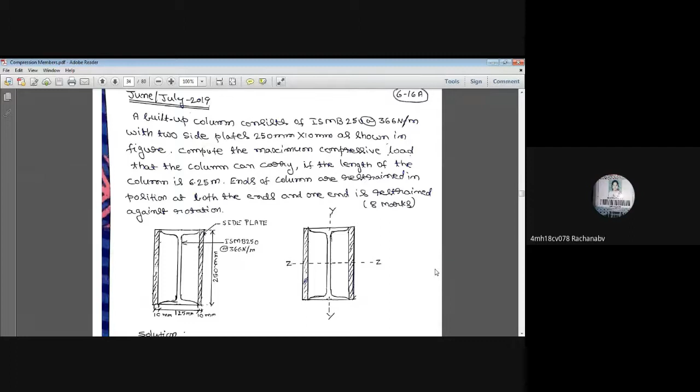So in continuation with the previous class, the same kind of problem, same procedure, but the type of section given has a slight variation. The same question is asked in the June-July 2019 question paper. A built-up column consists of ISMB 250 at 366 Newton per meter with two side plates 250 mm width and 10 mm thick as shown in the figure, which is also provided in the question.

Compute the maximum compressive load that the column can carry if the length of the column is 6.25 meter. The length of the column is given, and ends of the column are restrained in position at both ends, and one end is restrained against rotation. The end condition of the column is also provided, and this problem is asked for 8 marks.

Look at the question or the figure, whatever information is provided. ISMB 250 at 366 Newton per meter section is given, and the height and thickness of the plate are also given. So what we need to calculate is the maximum compressive load that the column can carry. Let us write down the information provided.

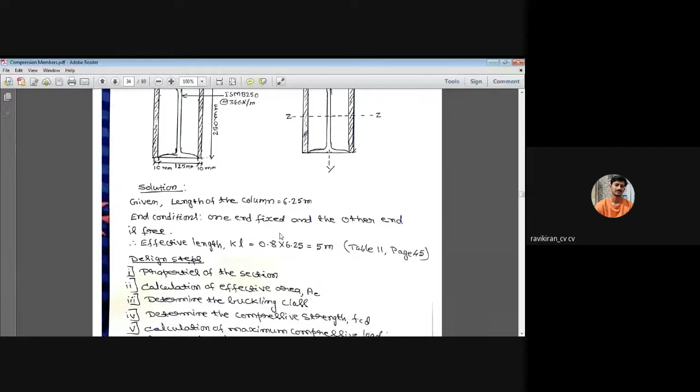First, the length of the column is given, that is 6.25 meter, and the end condition is provided: one end is fixed and the other end is free. So the effective length of the column will become...

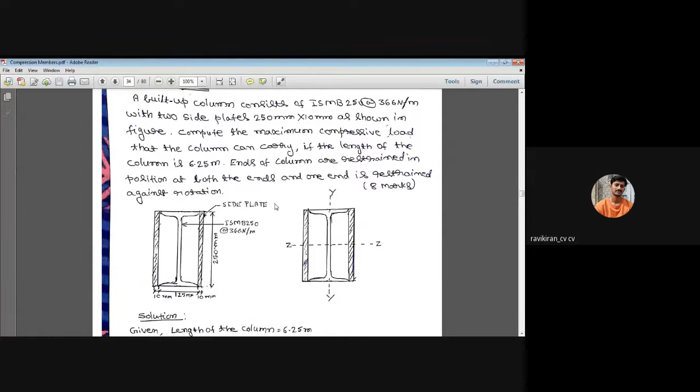Ravi Kiran, there's a correction. It is not free, the other end is hinged. So both ends are hinged. No, one end is fixed. Ends of the column are restrained in position means they are in position, that means they cannot move. They are not free.

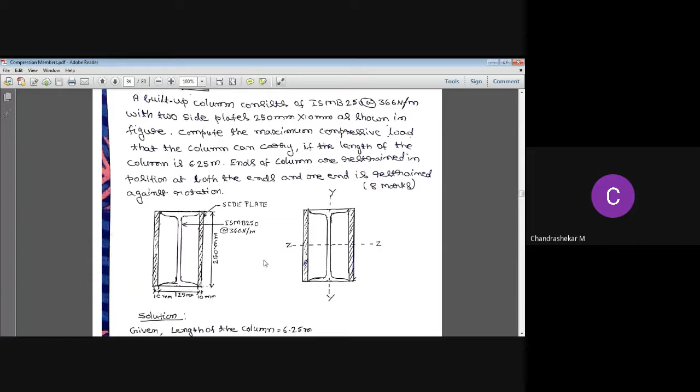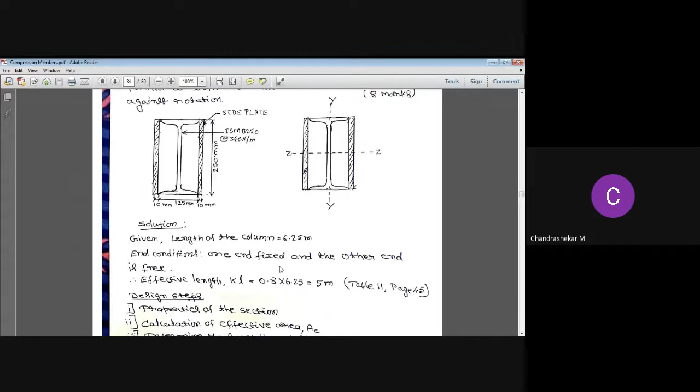It is as good as both ends being hinged. The problem further says one end is restrained against rotation, meaning at one of the hinged ends restrained against rotation, that is fixed. That is nothing but one end fixed and the other end hinged. Please change that sentence, correcting the mistake: one end is fixed and the other end is hinged, not free.

Go to page number 45, table 11, there you'll see the value taken. Effective length KL equal to 0.8 multiplied by 6.25, since 0.8 corresponds to one end fixed and the other end hinged. So everything is okay except that word I wrote earlier. End conditions: one end is fixed, other end is hinged, strike off that 'free'. That's all the correction, sorry for that, thank you.

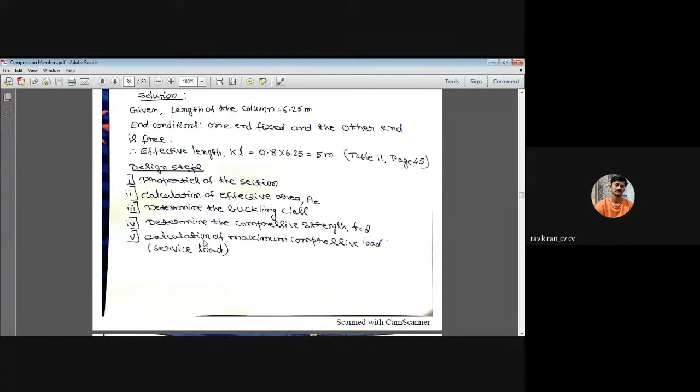The effective length remains as per table 11, page number 45 of IS 800, so the effective length becomes 5 meter. What are the design steps we usually follow? Initially we write down the properties of the section, calculate effective area, determine the buckling class, determine the compressive strength FCD value, and then calculate the maximum compressive load and service load.

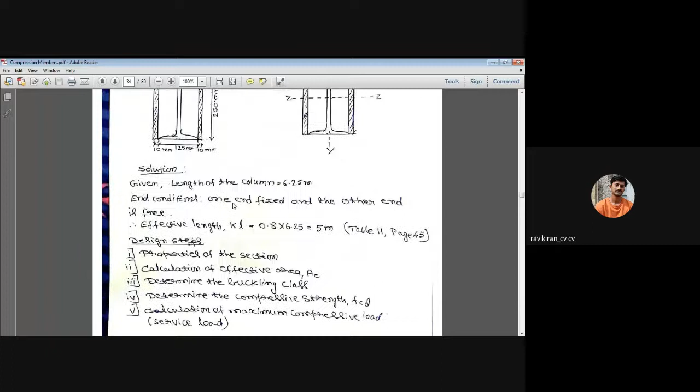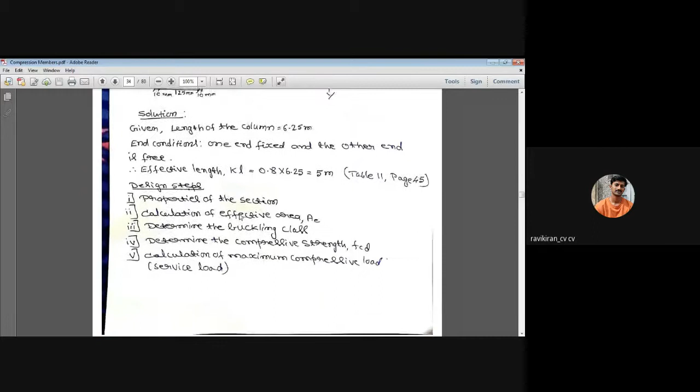The first step is properties of the section. How do we write down the properties of the section? By looking at the steel table for ISMB 250 at 366 Newton per meter. Anyone from the student side, please tell me the properties of this section, what values you are going to take from the steel table.

What is the sectional area? 4755. What is the unit? Millimeter square. And what else information are you going to take from the steel table?

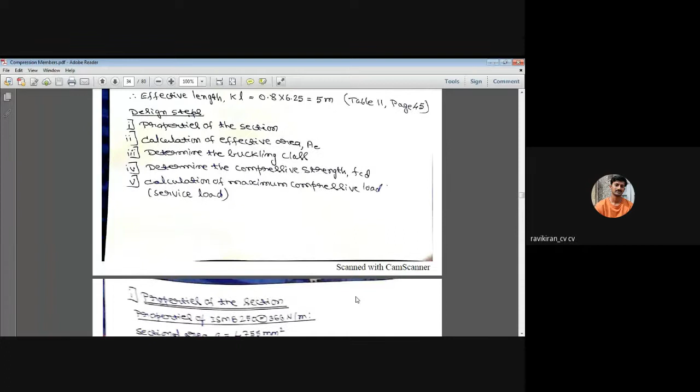Depth of the section is 250 mm, width of the flange is 125 mm, thickness of the flange is 12.5 mm, and thickness of the web is 6.9 mm.

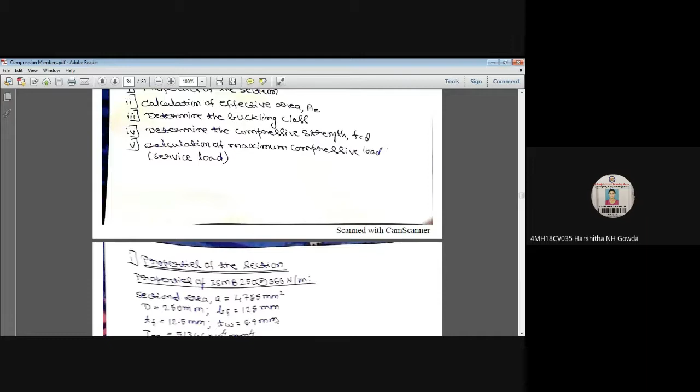Moment of inertia IZZ is 5131.6 into 10 power of 4 millimeter to the power of 4, and IYY is 334.5 into 10 to the power of 4 mm to the power of 4. Good, Harshitha, you said IZZ, I'm really happy, instead of saying IXX, good.

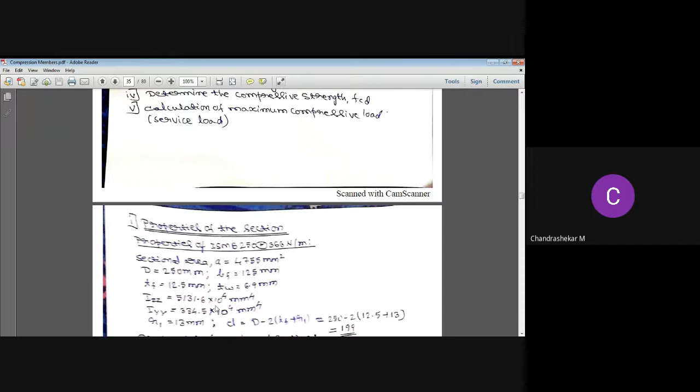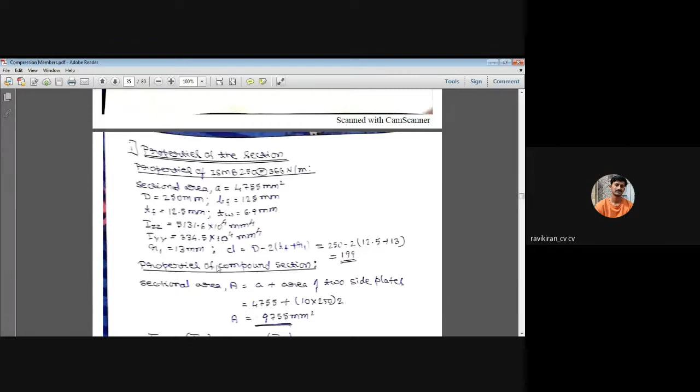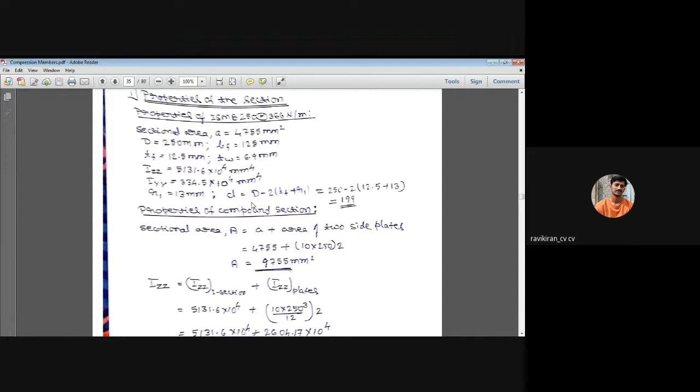The next is root radius, which is 13 millimeter. Don't confuse root radius with radius of gyration, both are provided in the steel table. Why do we need this root radius? To get the effective height of the web section, small d equals overall depth 250 minus 2 times thickness of flange plus root radius, which gives us 199.

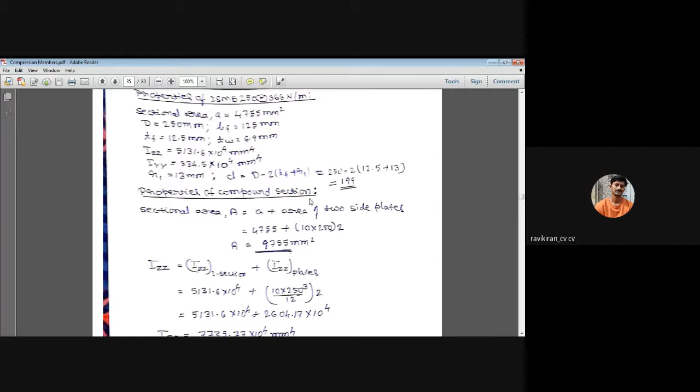And next is properties of the compound section. Compound section means along with the I-section we have two cover plates or two plates, right?

Side plates. Instead of mentioning cover plates, because it is given in the sides, let us consider side plates. So for the I section it is 4755 mm square, and for the side plates it is given 10 mm thick and 250 width into two plates, which will give us sectional area for the compound section as 9755 millimeter square.

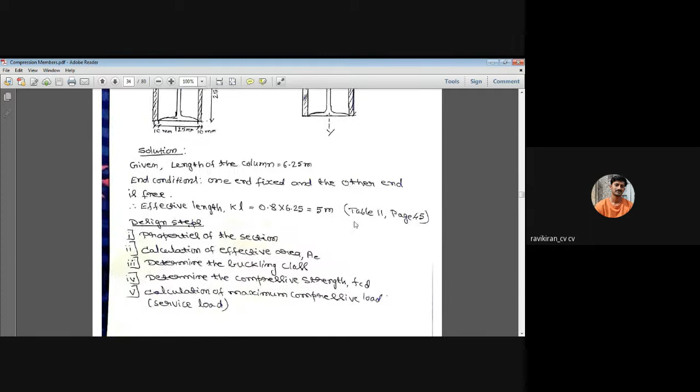Let us do IZZ for the compound section, that is I section as well as plates. For I section it is directly taken from the steel table, and for the plates it is BD cube by 12. We are in the ZZ plane, so just observe the figure. What about area into h square? There will not be height because it is in the same plane, so just BD cube by 12 is enough here. If you do this, IZZ value will be 7735.77 into 10 power 4 mm power 4.

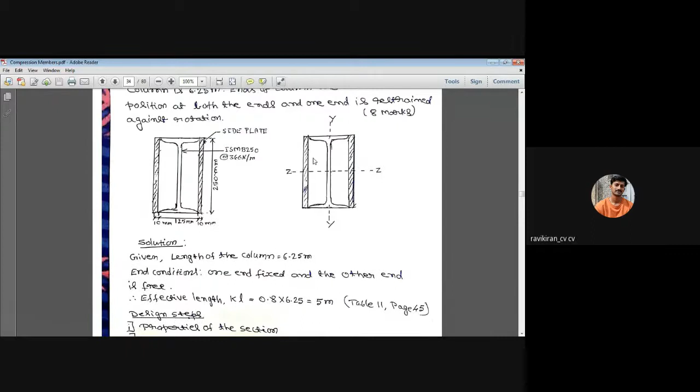Similarly, we should do for the IYY direction. For I section directly you can take from the steel table, and for plates, BD cube by 12 plus area into h square. How to do that? In terms of the y direction, look at the figure. This is the axis, and from here, the center of this plate. So total width is 250, divided by 2 means it is 125, and again half of the thickness of the plate, so 125 by 2 plus 10 by 2, h square is.

If we do this, the IYY final value will be. Ignore the 250 multiplied by 10 cube by 12 because it's a small quantity. I told you to develop the habit of ignoring this small number. Remember, this 250 multiplied by 10 cube divided by 12 can be ignored. Even if you add it, in this case it doesn't matter, it's not going to make much difference. Just for your information, that's all. So the IYY value will be 2616.79 into 10 power 4 mm power 4.

Once we got the moment of inertia values, we can compare ZZ terms and YY terms. The least value will be in YY in this case, so Iyy is 2616. Once we got this, we can go with the least radius of gyration, that is r is equal to square root of I by a. Here in the y plane it is least, so ryy is square root of Iyy divided by area. Iyy value is this, and area we calculated for the compound section, not for the I section. Once we do this, least radius of gyration ryy, we got 51.79 millimeter.

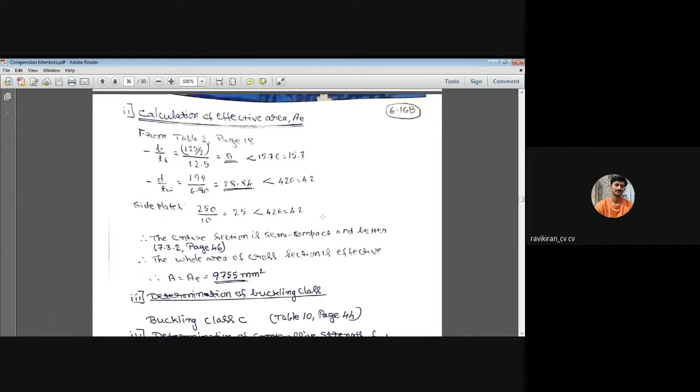Breadth means half of the breadth you should consider, 125 by 2, and thickness of the flange is 12.5, which is equal to 5, and that is less than 15.7 epsilon. If you open table 2, you will understand this. Same way for side plates you should do, that is also coming within the limits. So the entire section is semi-compact, and you can consider the whole area of cross section as effective. So the effective area remains 9755 mm square.

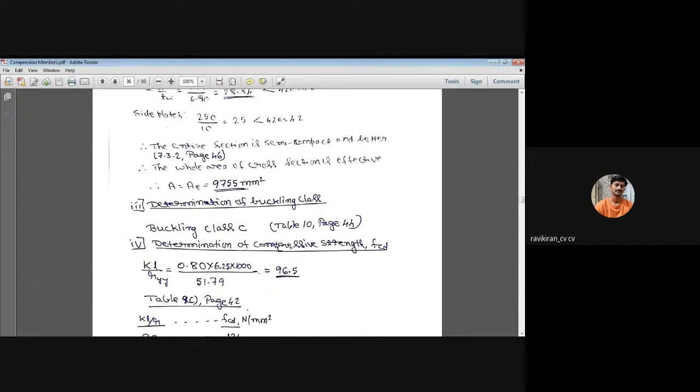Next, determination of buckling class. Initially we mentioned in the previous class, for any built up sections or compound sections, you can go with buckling class C. That is available in page number 44, table 10 of IS 800. Once we got this, what is the next step? Calculation of design compressive strength FCD based on table values. For that, you need to calculate KL by R, that is the slenderness ratio.

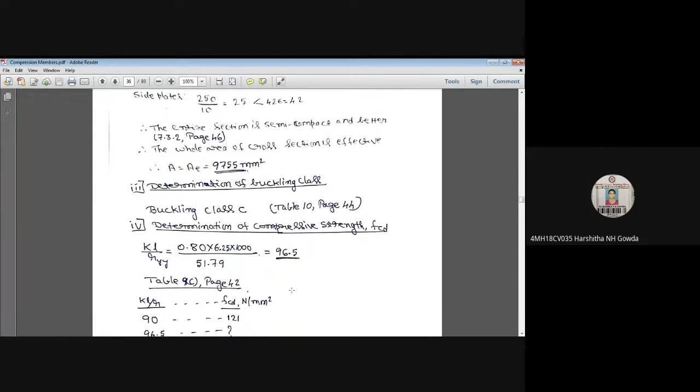If we do this, we are going to get 96.5. The values are available in page 42, table 9C. In that, anybody open and tell me the value for 90 and 100, slenderness ratio of 90 and 100. What is the FCD value from page 42? 90 is 121, correct? 100 is 107, correct. And anyone please interpolate between these two values and tell me what is for 96.5. Do the interpolation for 96.5 and tell me what is the FCD value.

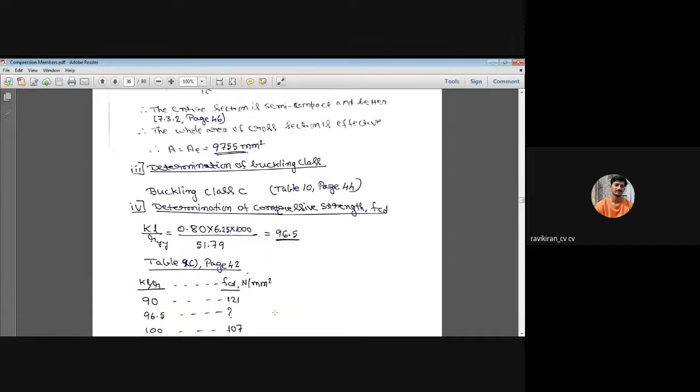111.9. I hope you are not telling from the notes. You have calculated, right? Yes, sir. Okay.

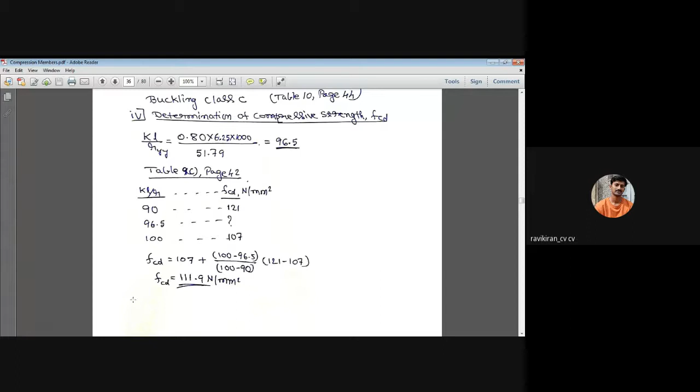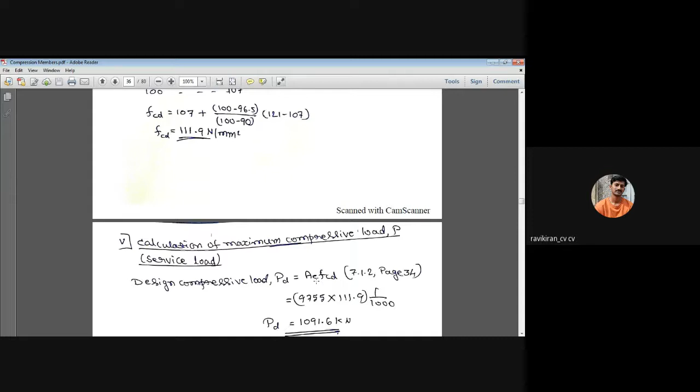So FCD is 111.9. Once we got FCD, what is the next step? Calculation of maximum compressive load, that is P. PD is equal to effective area into FCD. Effective area we just calculated in the previous step, and FCD we got it now.

If we do this, we are going to get design compressive load, but actually what we should calculate is the service load. For that, let us consider factor of safety as 1.5 for the design load. Then the service load will become 727.7 kilonewton. So that is what the maximum compressive load P, 720.

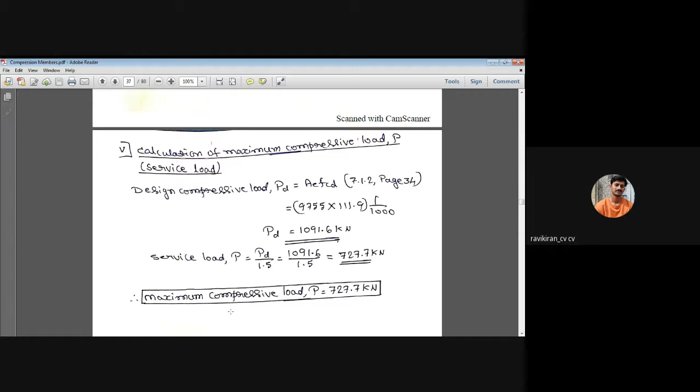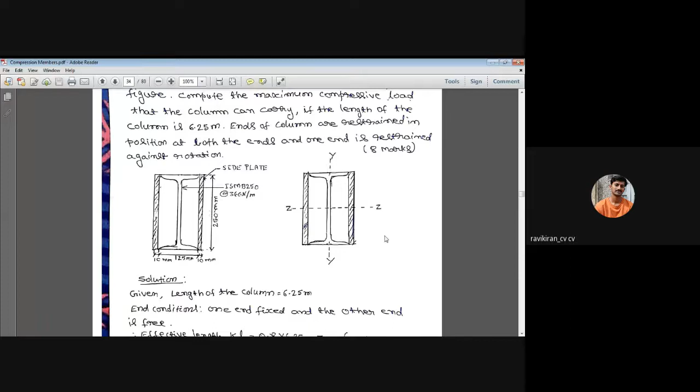This is how you should show in the examination. Highlighting the final answer is very important. If you have any doubt, you can ask me. The same procedure we followed, only the section or the figure given is a bit different from previous problems. That is why we did this one again. If you have any doubt, you can ask me.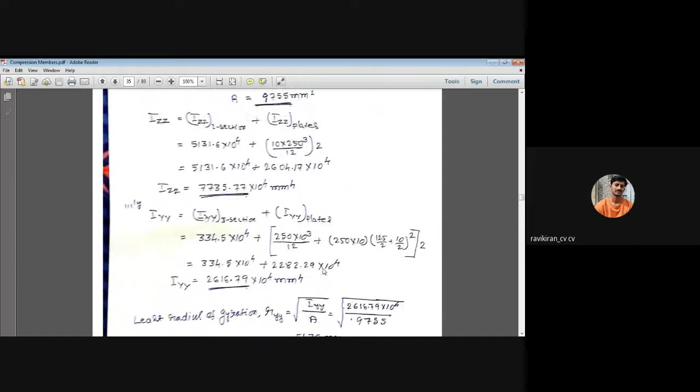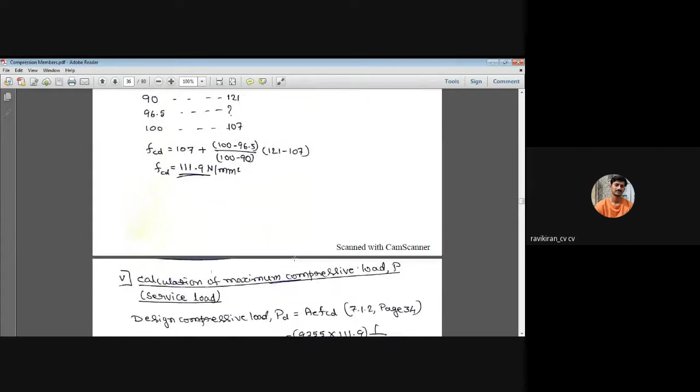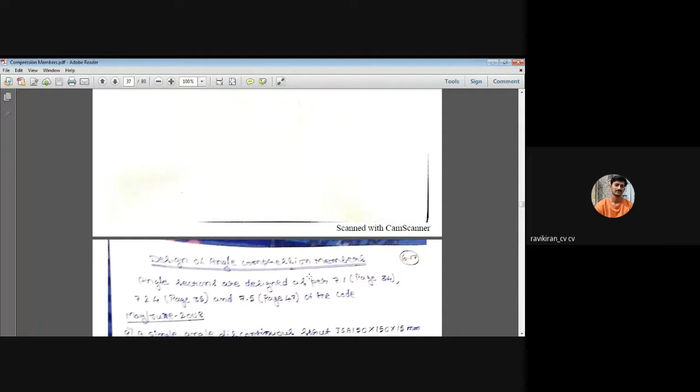If not, let us move on to the angle section. If we consider angle section as a compression member, how do we design that, and where are we going to get angle section as a compression member? As we said in the initial class or in the introduction part, it will be used sometimes as a strut in roof truss.

Design of angle compression member. This is one of the members in this part. Angle sections are designed as per clause 7.1, that is page 34. Also 7.2.4, page 35, and page 47, that is 7.5. You need to follow these pages from IS 800.

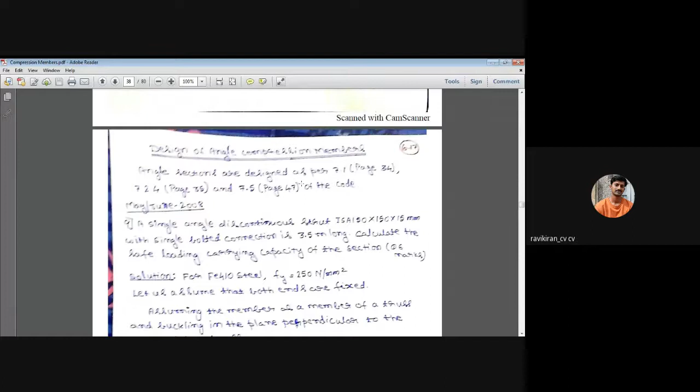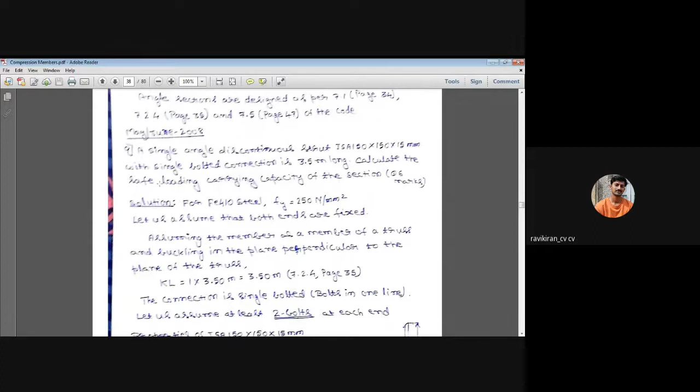So this question is provided in May-June 2008 paper. That is a single angle discontinuous strut ISA 150 by 150 by 15 millimeter. See the angle, both the legs are having 150 and 150 dimension, that means it is symmetrical, both sides same, and thickness is 15 millimeter with single bolted connection and having height of 3.5 meter long.

Calculate the safe load bearing capacity of the section. We need to calculate safe load carrying capacity. So the angle is given, height is given, and what else? Nothing. And calculate the safe load carrying capacity. So let us write down whatever information is provided.

If it is not given, let us consider Fe 410 steel and yield strength as 250 Newton per mm square. Also, let us assume, because support condition is not given, but it is mentioned with single bolted connection, that both ends are fixed, assuming the member as a strut in a truss and buckling in the plane perpendicular to the plane of the truss.

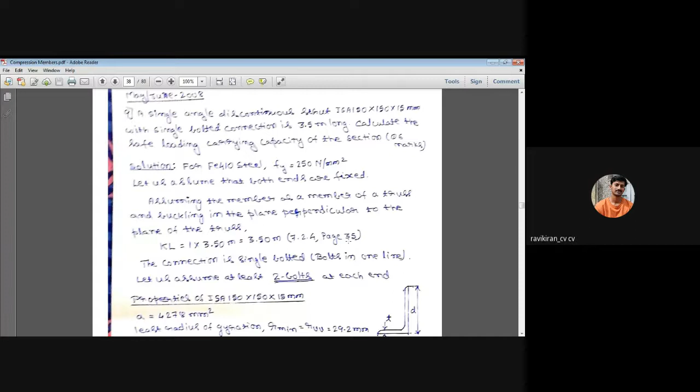If you open page 35, you'll understand. Anybody open page 35 from IS 800? Page 35. Open and state what is the statement written. Just read out. Anyone? Page 35, 7.2.4 compression members in trusses.

In case of bolted, riveted or welded trusses and braced frames, the effective length KL of the compression members shall be taken as 0.7 to 1.0 times the distance between the centers of connections, depending on the degree of end restraint provided. Correct.

In case of members of trusses buckling in the plane perpendicular to the plane of truss, the effective length KL shall be taken as distance between the centers of intersection. The design of angle strut shall be as per 7.5. That is enough. Thank you.

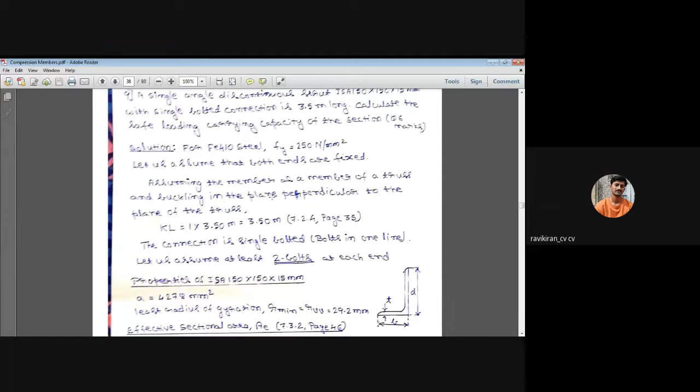This is how, while solving the problem, you should go through every page from the code book which is relevant. Otherwise, definitely you will not understand.

So let us consider the connection is single bolted, that means bolts are provided in one line, and assume two bolts at each end, one at the other corners. So first we should write down the properties, that is ISA 150 by 150 by 15 angle section properties. What is the area provided from the steel table? The area is 4278 millimeter square.

And what is the least radius of gyration? Open steel table and check what is the value given for least radius of gyration for ISA 150 by 150 by 15. All of you should open this. What is the least radius of gyration provided? So what is the page number you are going to, guys?

One of you: 22, sir. Good, so that is page 22 in KLV Ramu. Okay, and what is the R value mentioned? Least radius of gyration you should consider here. What is the least value? Anybody? See, there are three values: Rxx, Ryy, same way Rvv and Ruu, right, for angle section.

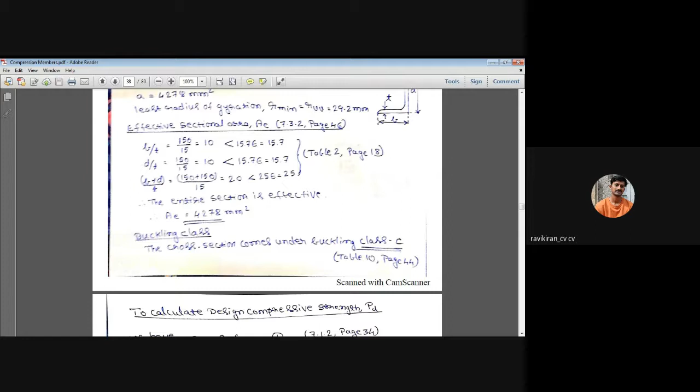See, if you look at the figure, you will understand. Row 2, 3, 4, fifth row - or the second-last row from the bottom. Angle section is provided, right? Channel, angle, T, and solid section. For that, what is the buckling class? C? Yes, buckling class C.

Always, for all types of section given here, you should blindly choose C as the buckling class.

And next, once you've got the buckling class, the next step is to calculate the design compressive strength. Initially, in the previous problems, we used to follow the procedure of going with the KL by R value and taking the value of FCD from the table, by knowing the buckling class.

But here, as it is an angle section, open page number 35. Open page number 35. Here, the slenderness ratio lambda, we need to consider as equivalent slenderness ratio.

The procedure remains the same, but calculation of the lambda value will be somewhat different. For that, you should follow the steps on page number 48. Just open all of you page number 48 to calculate the equivalent slenderness ratio.

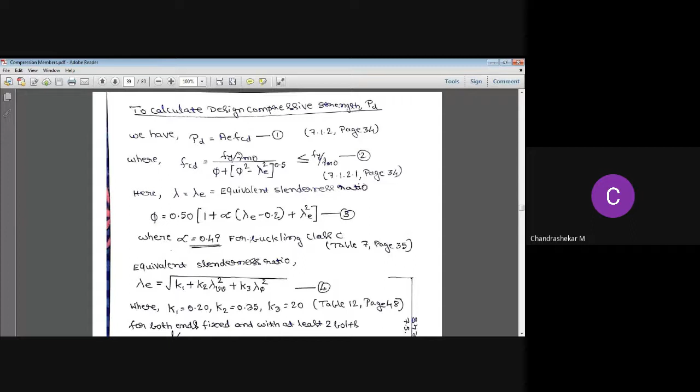So up to equation 1, 2, and 3, I have written. We took that from page number 34. From that point, the formula jumps to page number 48. That's where you are going to use lambda E. In the previous case, you were supposed to use lambda. Here, we are not using lambda - instead we are going to use lambda E, which is the equivalent slenderness ratio. This is for a single angle section. Is it clear to you? Ravikiran, you can proceed.

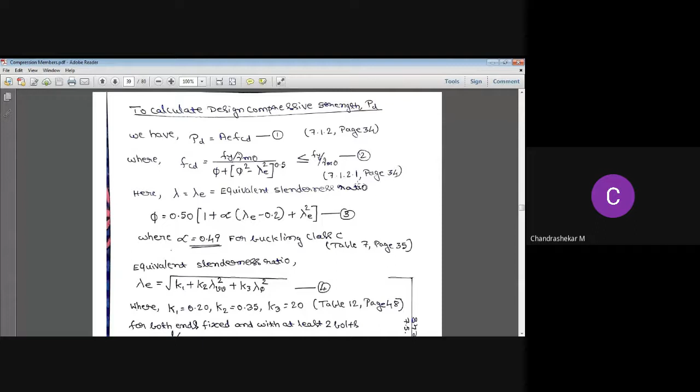Hello? Can you hear me, Ravikiran? Hello? Yes sir. Okay, you can proceed. Yes sir, now it is okay.

I hope you understood why we should consider the equivalent slenderness ratio value for an angle section. Based on that knowledge, let us continue how to calculate the values.

Lambda, that is slenderness ratio. Let us go one by one. Phi is equal to 0.5 times 1 plus alpha into slenderness ratio minus 0.2 plus slenderness ratio squared. Here the unknown things are alpha as well as the equivalent slenderness ratio value. Alpha you can get from table 7 of page 35 for buckling class C, that is 0.49. And equivalent slenderness ratio can be calculated using the equation: square root of K1 plus K2 lambda VV squared plus K3 lambda phi squared. This equation is available on page 48 of IS 800, and the K1, K2, K3 values are also available on the same page, in table 12.

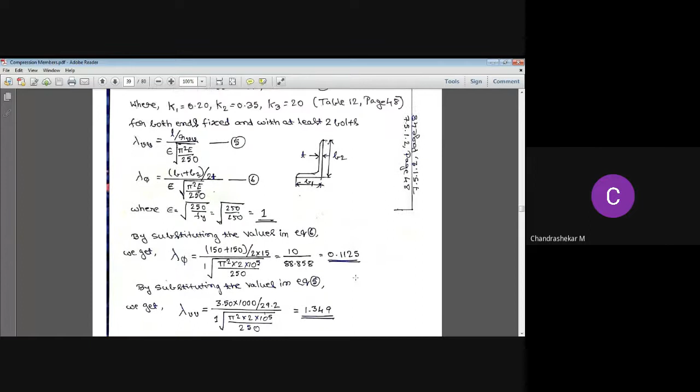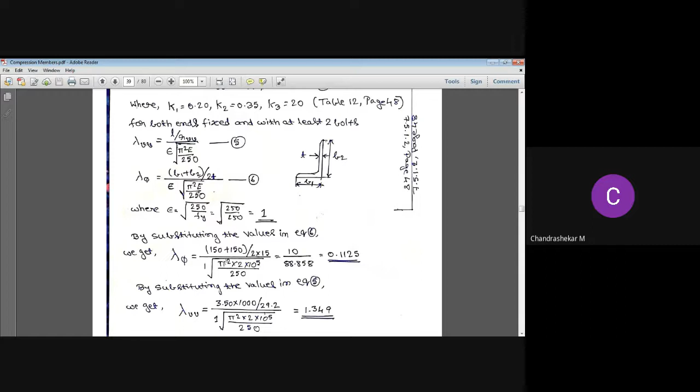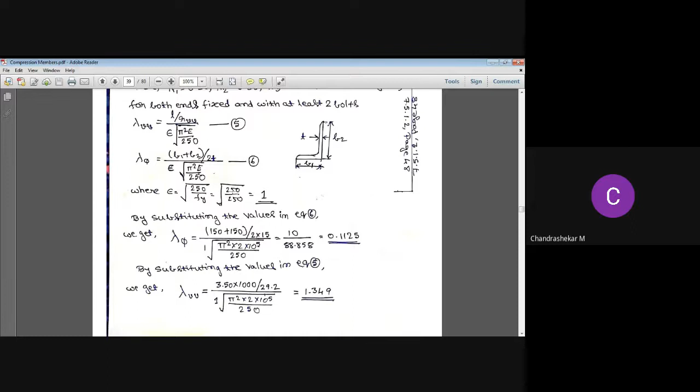Okay Ravikiran, can I interfere? Yes sir. Guys, go to page number 48, under 7.5.1.2. If you look at the formula, lambda VV equal to L by RVV divided by epsilon square root of pi square epsilon - it is not square root of pi square epsilon divided by 250, it should be E, capital E, Young's modulus. So it is a typing mistake - change epsilon to E under the square root. There is one outside the square root, that is epsilon, that is correct. So under the square root it should be pi square E, not pi square epsilon. Similarly, the next one on the same line, lambda phi equal to B1 plus B2 divided by 2t, divided by epsilon - that is correct - square root of pi square E, it is not epsilon. Please change that to E, capital E, Young's modulus, divided by 250.

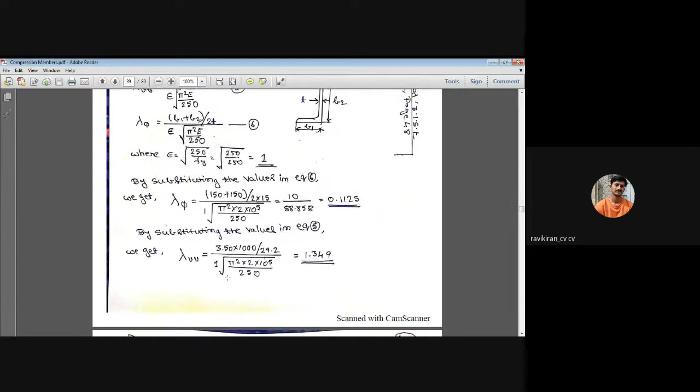So that's all the correction is. Okay, once you calculated these values, you can go back to the previous equation, that is equivalent lambda or equivalent slenderness ratio value, equation number 4. Go down. By substituting the previous values in equation 4, you are going to get the equivalent slenderness ratio value.

You know what is the alpha and equivalent slenderness value. You can get the phi value by substituting, and once we get this, we go with the FCD value, that is 250 divided by 1.1, the standard equation which was equation number 2, provided in page 34. Substitute, and you will get FCD.

Once we got FCD, let us move on to equation 1, that is area into FCD. FCD is 117.3 Newton per mm square. By substituting FCD in equation 1, that is PD equals area into FCD, effective area we already calculated, FCD value we just calculated. The design load will be 501.81 kilonewton.

But we need to calculate the actual or safe load, which is not the design load. For that, safe service load, we should consider some factor of safety. Let us consider factor of safety as 1.5, which is also available in page number 29, table 4 of IS 800. If we do this, we get safe service load as 334.54 kilonewton, and this is the final answer. The safe load carrying capacity of the section 150 by 150 by 15 mm of 3.5 meter length is 334.54 kilonewton.

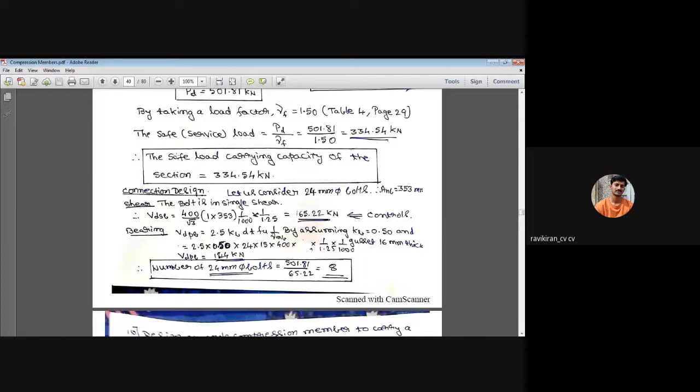Actually, as per the question, I hope this is sufficient. If it is asked to calculate the connection design or show the connection design, you need to calculate further, that is how many number of bolts are required. So I feel all of you understood this. If you have any doubt, please ask us.

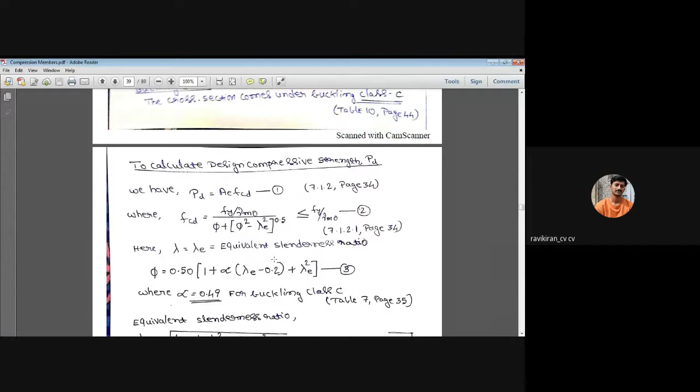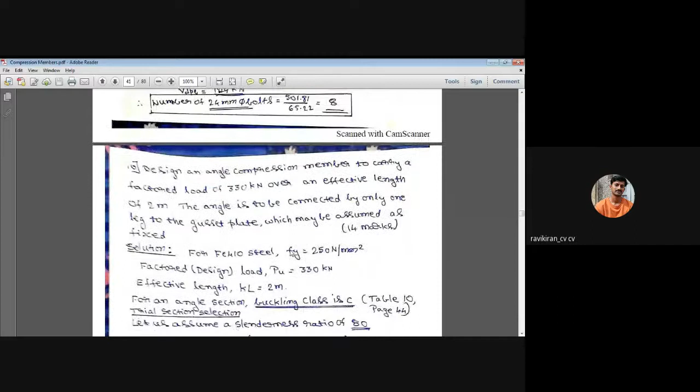Design the next problem: design an angle compression member to carry a factored load of 330 kilonewton over an effective length, directly given as 2 meters. The angle is to be connected by only one leg to the gusset plate, which may be assumed as fixed, and this problem is asked for 14 marks.

Let us write down the data provided: for Fe 410 steel and yield strength as 250. The factored load is given as 330 kilonewton. Effective length, directly KL value is given as 2 meter. And this is an angle section, so angle section means what is the buckling class? It will be C.

Let us see what else information is provided here. Only load and effective length. What type of section is it provided? Is it mentioned what type of section? Just it is mentioned angle compression member. Design an angle compression member. So we need to choose a section to satisfy this load and also this length. So for that, initially in I section also, what we used to do, we used to assume.

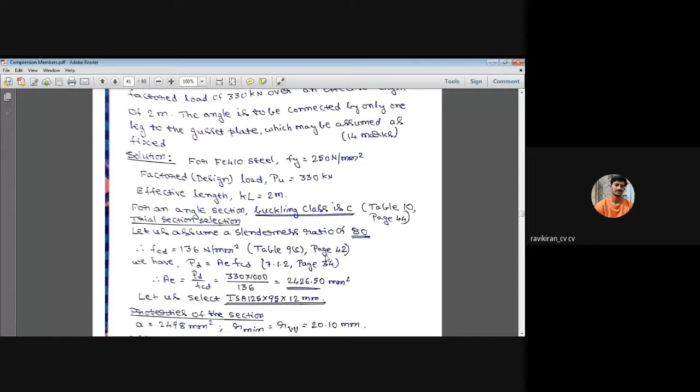When section is not provided in the question, we should assume slenderness ratio value as 80, and for that FCD from table 9C of page 42, it will be 136 Newton per mm square.

So we have PD equal to area into FCD, which is available on page number 34. The effective area will be PD divided by FCD, which gives us 2426.5 mm square. For this area, we should choose a section from the steel table to satisfy this area.

This is how we solved one problem for the I section, right? Same procedure we are following here. Once we selected a section, the procedure remains same. So based on this criteria, we have selected ISA 125 by 95 by 12 mm. You can choose equal angle section or unequal angle section to satisfy this area of 2426.5 mm square.

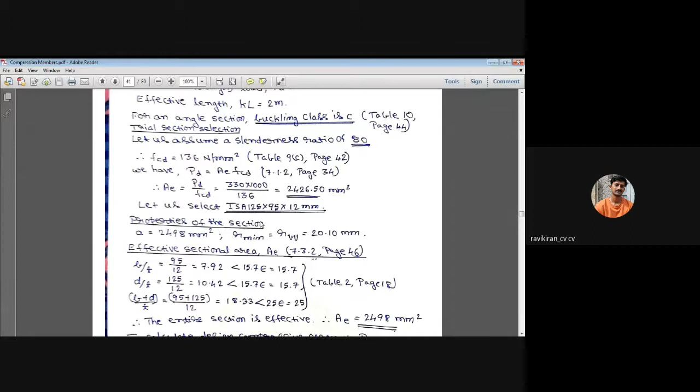So we have chosen 125 by 95 by 12 mm section. For this, what are the properties? Effective area is equal to 2498 mm square. The actual area we got was 2426, but we have considered a slightly higher value, 2498 mm square, for this section. r minimum value is in the direction of VV, that is 20.1 millimeter.

To check whether the section is effective or not, open table 2 for angle section. This gives breadth to thickness ratio and depth to thickness ratio, as well as B plus D divided by T, which should be less than or equal to the values provided. It should be less than 15.7 epsilon, and if we add these two, it should be 25 times epsilon. So for the present moment, we have considered this.

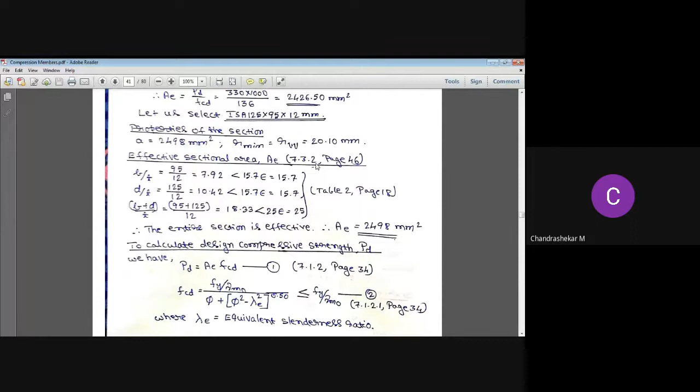Okay, can you hear, Ravi sir? Yes sir, I joined. The line got disconnected. So just one thing I want to add, if you go up a little bit. Yes sir, okay, you can stop there.

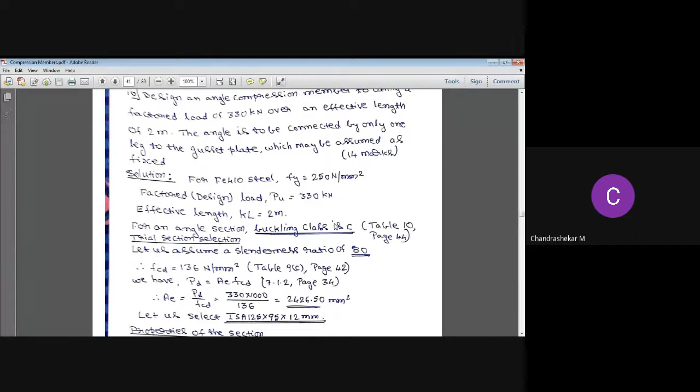Guys, if you look here, to find out the effective area AE, I have made use of table 9C on page number 42. But for single angle, I said we are not supposed to use that table, is it not? But this is just a preliminary design, we are trying to select a preliminary section. Later on we are going to check whether it is adequate or not, and for that purpose I've used this table. For the detailed checking and detailed design, you are not supposed to use this table. This is only for preliminary design, that is for section selection. That's all, thank you Ravikiran, you can continue.

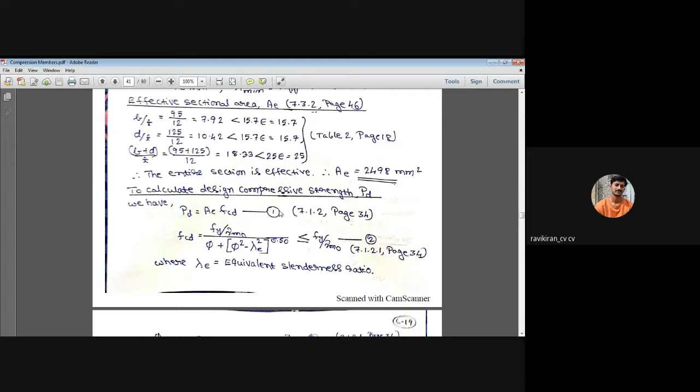So once we identified the section, the entire section is effective, and that effective area is 2498 mm square. The rest of the procedure remains same. We need to go to page number 48, whatever we did in the previous problem. Design load is equal to area into FCD.

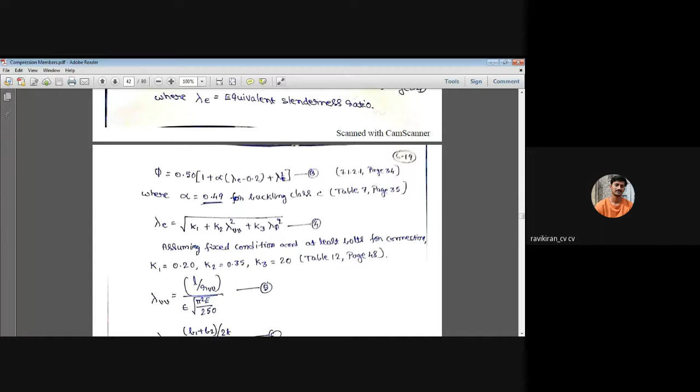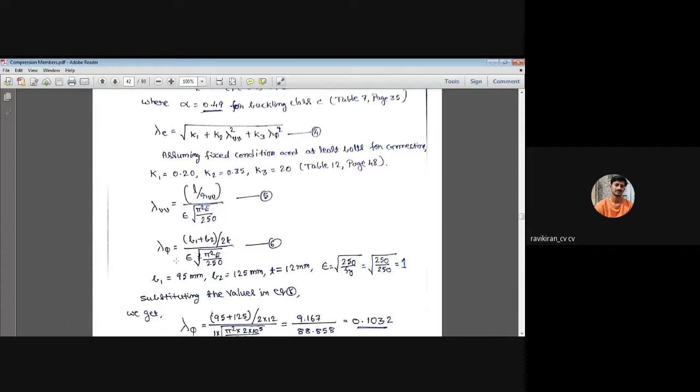To calculate FCD, this is what we want: equivalent slenderness ratio value. For that, constants K1, K2, K3 should be taken from table 12, and we need to find lambda VV square and lambda phi square using a formula. If you solve this, we get lambda phi value as 0.1032 and lambda VV value as 1.12. Substituting back into equation number 4, we get the equivalent slenderness ratio.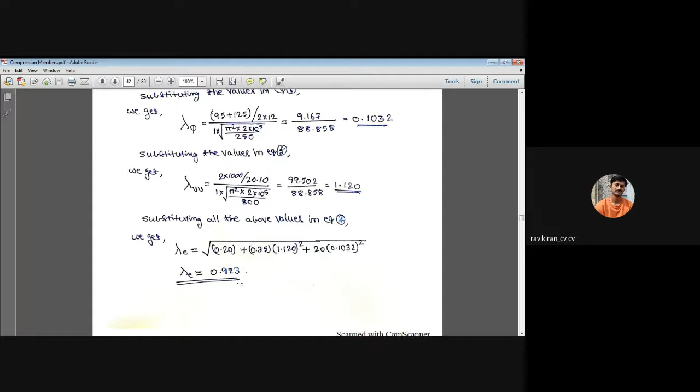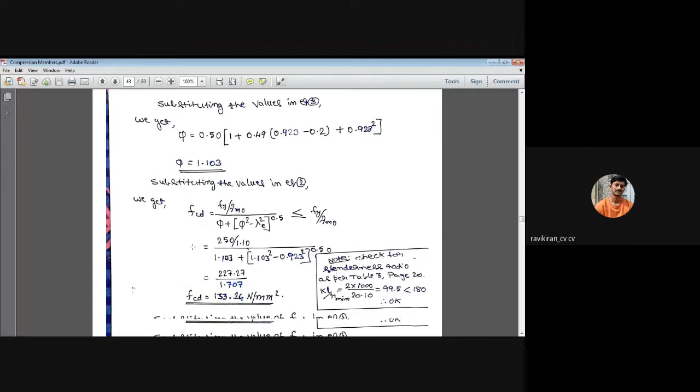Once we get this, we should substitute back into equation number 3. Phi is equal to 1.103. Once we get this, we can get the design compressive strength value, FCD, as 133.14 Newton per mm square.

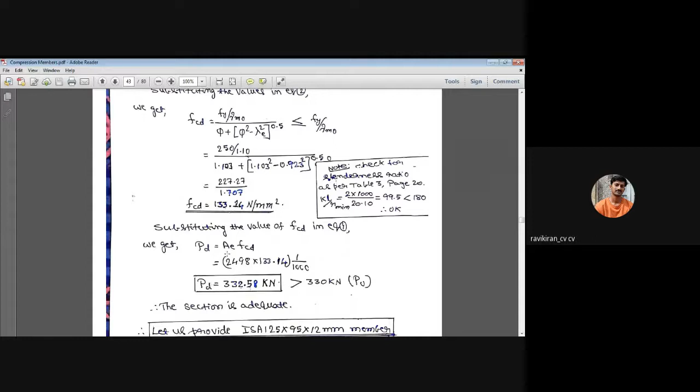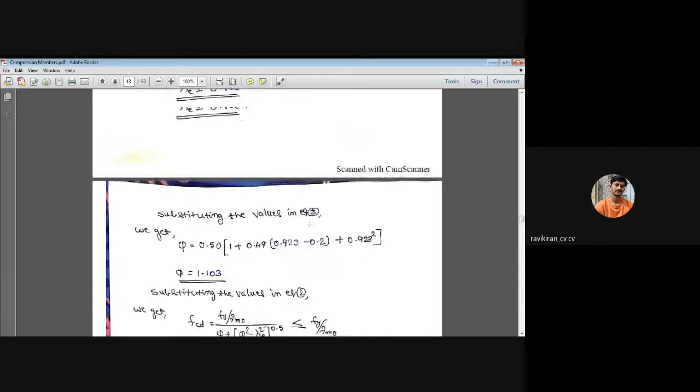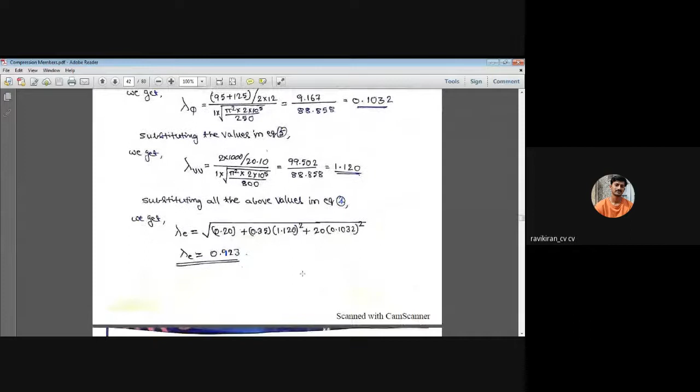Once we got FCD, design load is equal to effective area into FCD. So the design load is 332.58 kilonewton. What is the load given in the question? It is 330 kilonewton, the factored load. So the section we selected is carrying 332.58 kilonewton, which is more than the required 330 kilonewton.

If the selected section does not come within 330 kilonewton, we should again increase the area of the section and select a higher value section, continuing the same procedure. So for the present moment, ISA 125 by 95 by 12 mm section is sufficient to carry the given load.

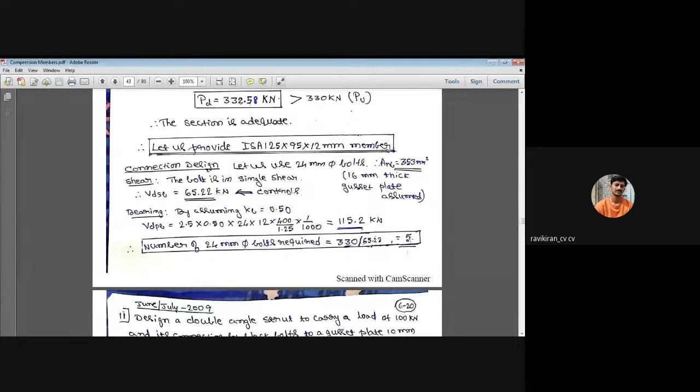Again, if you want to do the connection for the same column, you should calculate the bolt value or bolt strength in shear as well as bearing, whichever is least. Considering 330 kilonewton, if you apply, we are going to get 5 number of bolts. So with this, the connection design completes for single angle.

I hope you understood this. If you have any doubt, please ask us.

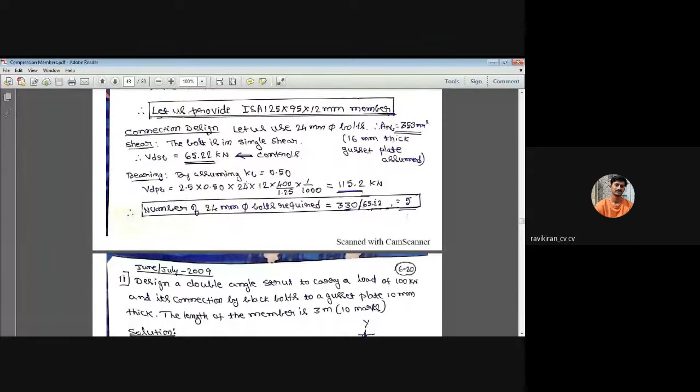Open the code book and try to understand today itself, because this is a bit variant, different type of problem. Next class we'll solve the double angle strut problem.